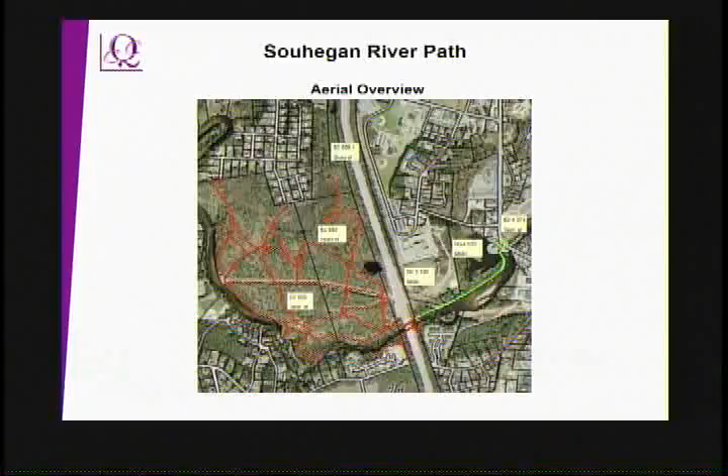Real quick, you've all seen this, I'm sure most of you. This is an aerial view put together by Kyle when he did the request for qualifications. Everything in red is current existing trails to the west of the Everett Turnpike, and the Everett Turnpike is in the middle. The green is the project limits, which goes from the Everett Turnpike down to Watson Park.

As most of you know, adjacent to the Everett Turnpike is a pedestrian bridge that the town acquired some time ago and had installed during the reconstruction of the Everett Turnpike, providing a crossing for the Souhegan from north to south. The existing trail picks up there, runs through the woods, and we're looking to upgrade the whole trail according to the requirements of what we want to do.

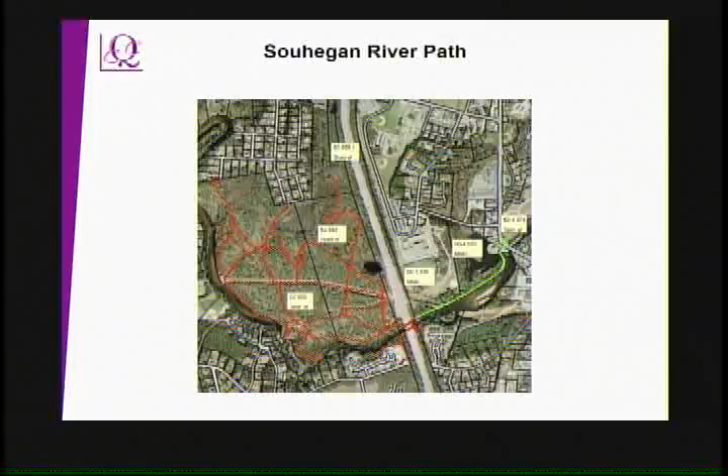Well, that didn't come through very good, did it? Anyway, existing conditions - we already did the existing conditions I talked about. We established a purpose and need that followed out after the local concerns meeting of June 17th, and we have forwarded that.

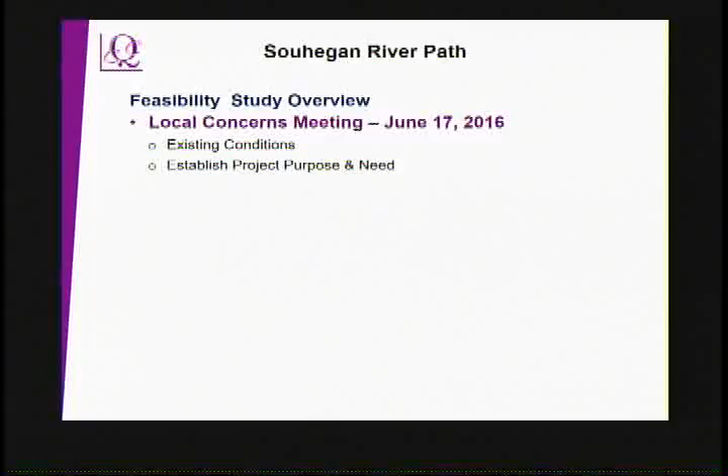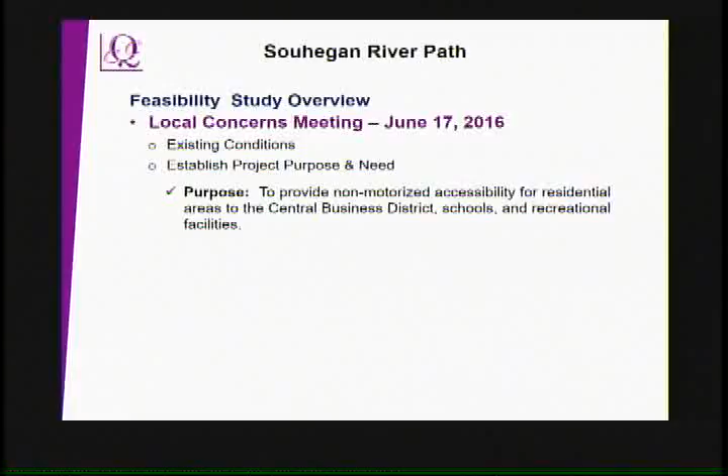Purpose is to provide non-motorized accessibility for residential areas to the central business district, to schools, and to recreational facilities, i.e. Watson Park. The need, as defined here - the need is to provide a connection from the Everett Turnpike pedestrian bridges and residential areas to the Central Business District, Watson Park, along the banks of the Souhegan River, basically the path as it exists today.

This trail surface is about 2,500 feet. It will be hard surfaced according to ADA requirements - hard surface meaning stone dust, things like that, it doesn't have to be paved. So it's easily accessible by people in wheelchairs, utilizing walkers, or any type of handicap, for anyone who wants to use it.

Without this trail, people would have to access through school properties to the east of the Everett Turnpike, go down Baboosic Brook and Baboosic Road, and back down to Watson Park, which is about a mile of detour. But it also means putting people through the schools, and as we all know in today's world, having random people walking through school property is not one of the best things to do while school is in session.

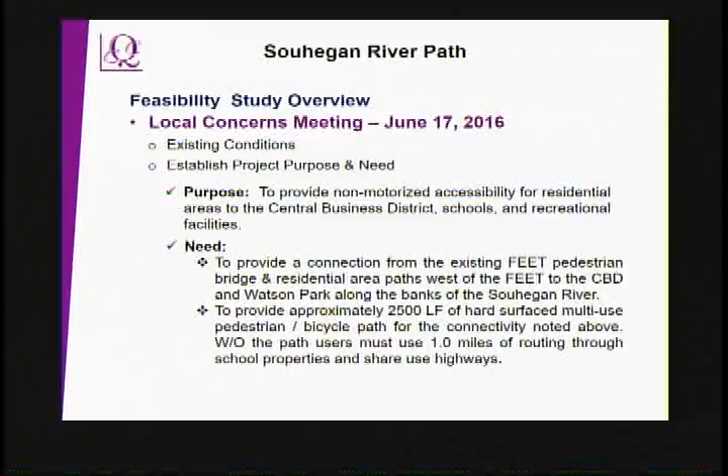So we developed 4 alternatives for the Souhegan River path. One of them, as I was just explaining to Nelson, is basically the Souhegan River path from the FE Everett Turnpike to the fire station. Then once we got to the fire station and crossed the impoundment area, we developed 3 different variations on a theme of getting from there to Watson Park.

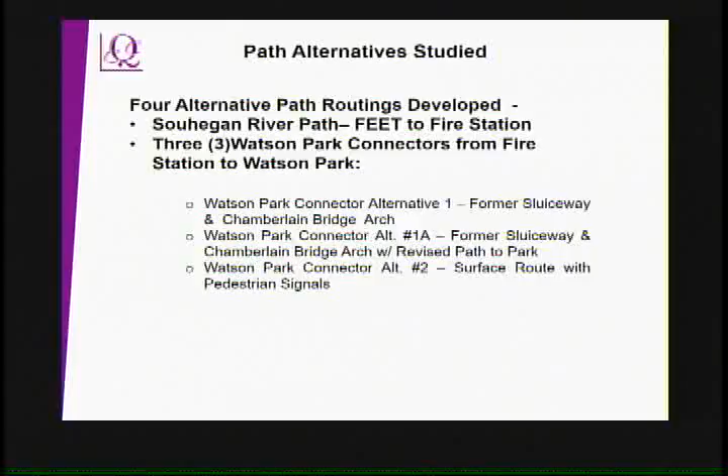Connector Alternative 1 goes down through the former sluiceway of the dam and underneath Chamberlain Bridge, utilizing the existing arch, then connects with Watson Park. It also has some reconstructive work necessary for the existing cantilevered sidewalk that's out there, since we'd be removing pieces of the support systems and constructing retaining walls.

Watson Park Connector Alternative 1A was a concept to look at moving the trail. Once we came through, underneath the Chamberlain Bridge, maybe we move a little further away. We still do the work required for cantilevered sidewalk repairs and reconstruction on US Route 3, but maybe move it out a bit and use more of an embankment fill so we don't need as high retaining walls. You'll see this illustrated later on as we go.

Alternative 2 was a completely new one, a surface route. Once we get across the former impoundment area, there's a drainage swale to get up to the fire station, then go by surface route, utilizing existing and enhanced municipal sidewalks to cross US Route 3 at the existing entrance to Watson Park, which would have to include pedestrian signals, as we all know the traffic volume out there.

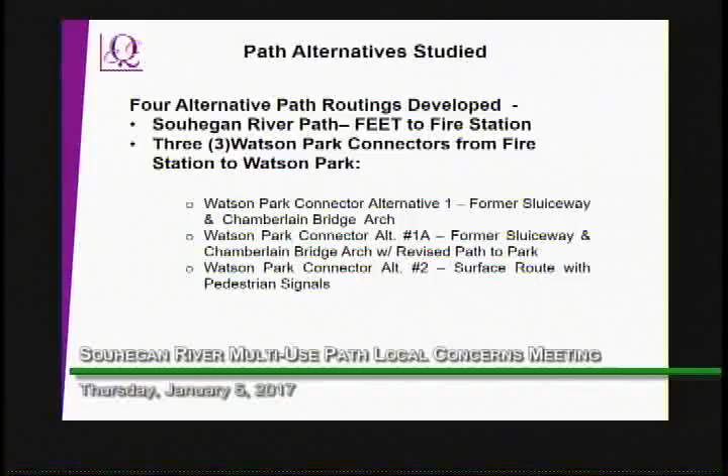So that's a synopsis, real quick, of what we were trying to do. Let me get started on some of this as we go forward.

The section from the Everett Turnpike to the fire station is about 1,965 feet. The existing trail out there is 5 to 6 feet wide. We are looking to widen it to 8 feet because the intent was to be shared use, for pedestrians, bicyclists, and so on.

Under federal highway guidelines for trails, shared use paths should be 8 to 10 feet wide, so you don't have to worry about pedestrians getting overrun by bicyclists. So we were looking at putting it in at 8 feet.

The other thing we're looking to do out there is keep it on the existing alignment as it goes through the trees. It's such a beautiful run. We don't want to start cutting down trees unnecessarily to straighten this out. We want to keep it curvilinear, which enhances the beauty and the desire to use the trail.

There's also, as you go forward, a number of interconnects that come down from the school, paths that come down. We want to maintain those and provide good access, a good interconnect there, so people can use it to get to the schools. That's one of the ideas of the purpose and need, getting access to the schools. So we'll keep those trails.

There's also a side trail that takes off and goes down by the river, and as you'll see going further, we're going to maintain that. It's not on the primary trail, but it comes off of it, and that would maintain that access.

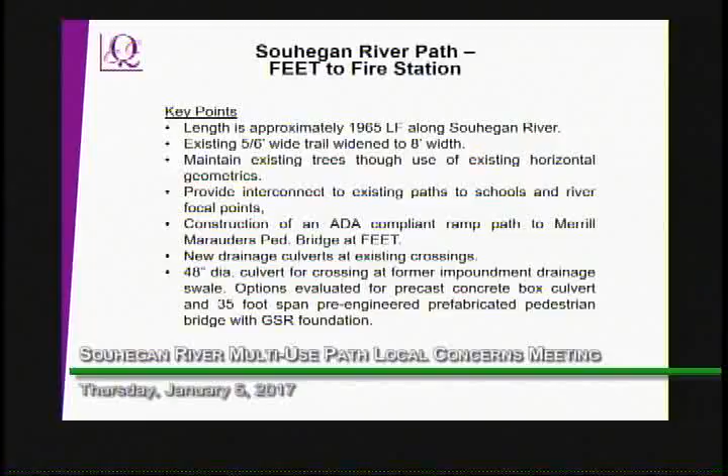So let me get into the first of the slides for the trail. They come down from starting at the Everett Turnpike and moving down towards the town. As you can see on the slide, we have the trail goes outside the existing trail and wraps around, comes back down.

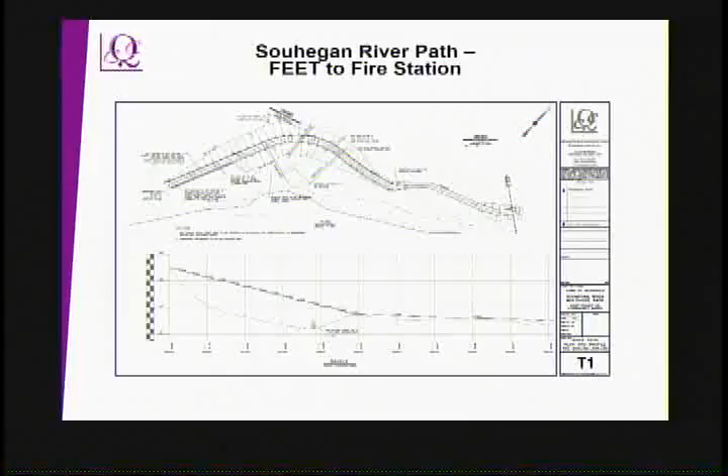The lines you see sloping out are called slope limits. We have to build this trail up quite a bit, 12 to 15 feet, to make the ADA handicap grades, maximum grades. Right now, the trail has a 19% grade as it comes up to the bridge. Not allowed under ADA. We have to adjust it so it is ADA accessible.

So that whole loop that comes out and comes back into the trail is all ADA accessible. As you can see to the left of the screen on the profile, there's a bunch at 12%, 1 in 12, 8%, and we've got resting areas to get this in. We're also replacing a footbridge with a 48-inch culvert, and basically mid-screen we come back onto the existing trail alignment and we continue forward through the project.

In some places it's a little steeper than ADA. We also had some footbridges, so what we're doing is putting in some culverts and kind of smoothing the trail out. The intent for most of the trail as we go through, you'll see, is to try to keep the elevation of the trail slightly above the existing, because as we smooth it out, put new gravels in, grade it off, and have it fairly uniform.

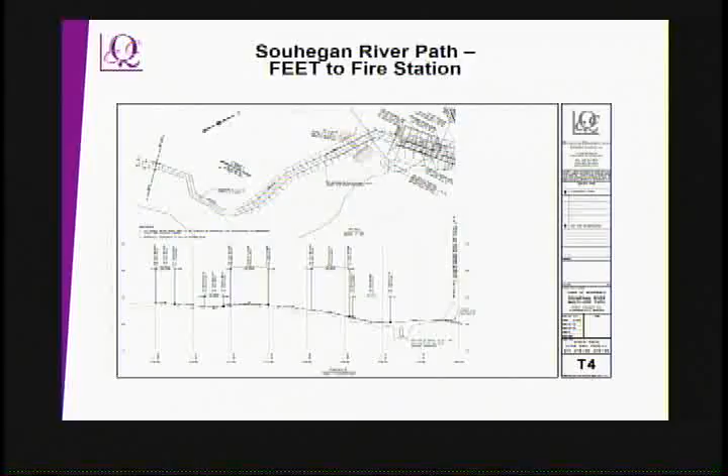How do we get from, once we cross the impoundment, do we either go down into the headgate structures for the old dam and go through the sluiceway, which is alternatives 1 and 1A, or do we at this point build a switchback ramp system to get up to the fire station, which is further detailed a little bit further on. So let me jump ahead.

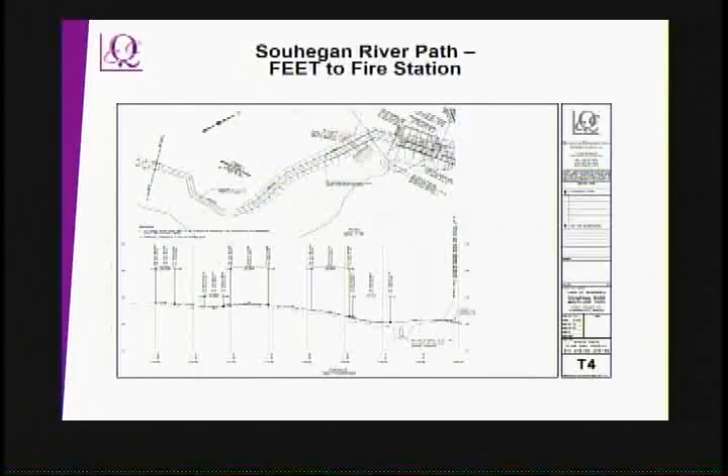We can come back for questions and look at this, but let's try to get through a lot of this. Alternative number one, this is the primary one that the TAP grant was based on, was getting down through the sluiceway, using the sluiceway.

This is about 440 feet of length, with an 8-foot width as we showed. We're using the historic head gates—there's 2 head gates down in there, approximately 6 feet wide, with sufficient head. Right now they're 6'8", but we've dug down and found about 15 inches of gravel. One has a bulkhead, one is concrete. If we take out the head gates themselves and just leave the existing opening, we have sufficient headroom for people.

to get through on a bike, as it appears right now. We continue to use the sluiceway as we get down through, go underneath Chamberlain Bridge, and get into that whole labyrinth of beams and retaining walls that were originally built by the DOT in support of International Shoe. When that was there, International Shoe left, and Harcross Chemicals came around. But all that was originally built by the DOT for loading docks and to support the roadway. So we're looking at taking that out.

I'll have some details in a minute on what that's going to look like. But we take the retaining walls out, put in a new retaining wall, slope it off, rebuild the cantilever sidewalk, and we have some MSE—mechanically stabilized earth walls. These are the retaining walls we're talking about. They use grids to hold the face panels up. They basically reinforce the earth, and the front panel just provides a nice closure to the system, because the earth is reinforced by the geogrids. It doesn't want to go anywhere.

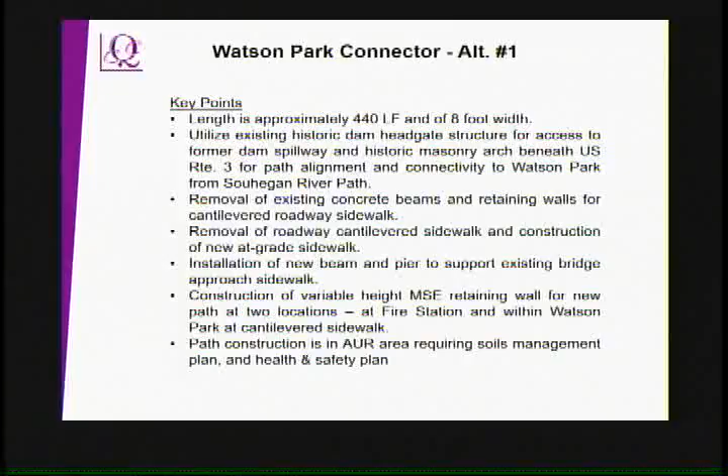What we did as alternate 1A basically follows the same thing—it's going to go back under, but as I said, we moved it a little further away. It's a little longer path. We tried to decrease the amount of MSE walls, the heights of MSE walls that had to be built in the vicinity of US Route 3. It pushed the path further into the AUR site, so there's more work with the contaminated soils.

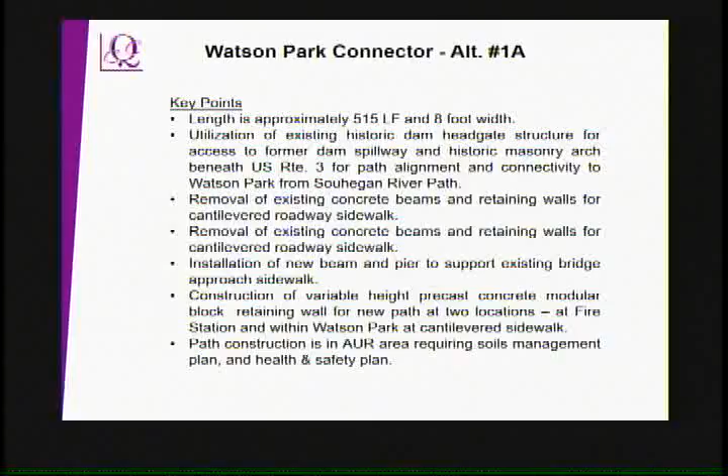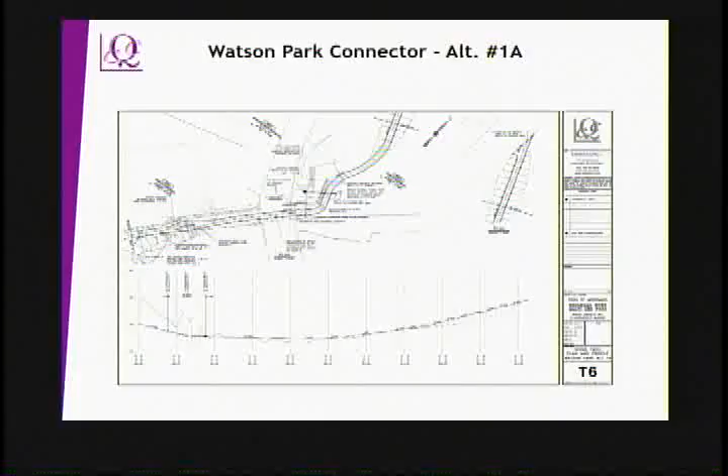The work for reconstructing the sidewalk, because we're taking this stuff out and building it on grade on the sidewalk along Route 3, that's still part of the process. Now let me give you a slide and update you on the differences between alternative 1 and 1A in that vicinity.

Okay, no. And that's what that would outlet into, is that channel, to take the water that collects in behind any rainwater coming off on the embankment, soaking down through, so we don't have hydrostatic pressure. It goes down in through there.

All of Route 3 work is still identically the same. You've got to take the cantilevered sidewalk off, you've got to infill with soil embankments, then you've got to rebuild the sidewalk. And then the trail is approximately the same elevation as we go through the project in this area, just a little longer run out through the AUR site.

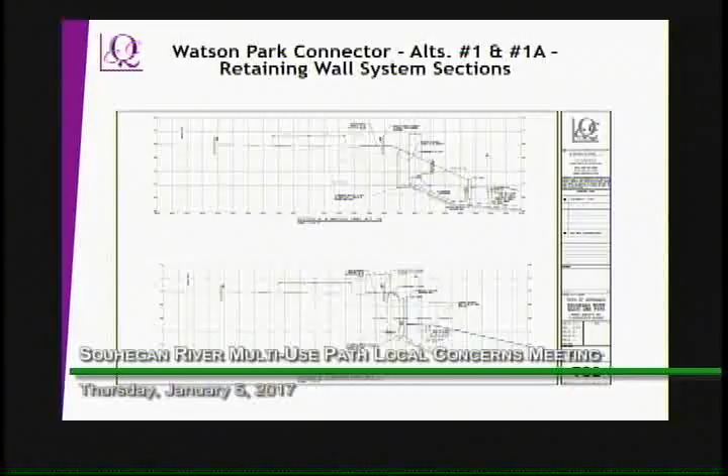I know I'm speeding through this, but I'm trying to get us all up to date. Now, alternative 2 -- this is the surface route that we looked at. It's approximately 750 feet long. It utilizes existing sidewalks on Route 3, the west side of Route 3.

There are areas where there is no sidewalk, down towards Buckley's Cafe, if you're familiar with that, the fire station. There's also, as you get closer towards Baboosic Lake Road, towards the entrance to Watson Park, a wide driveway that doesn't have a sidewalk. We'll have to put a sidewalk in there.

Municipal sidewalks are 5 feet, so what we construct would still be 5 feet. What's included in this, as I mentioned earlier, is we've got to come from a trail elevation down by the impoundment area of about 120 to something that's approximately at the fire station about 132, and it's a very steep slope right now. To make that accessible, we have to build this handicap switchback ramp system built at maximum gradient.

There's not a lot of land area there. Real estate's at a premium right there -- it was all taken up by the river and the dam. So that level area is very tight, and if we're going to put an 8-foot sidewalk in there, it's very close to the building.

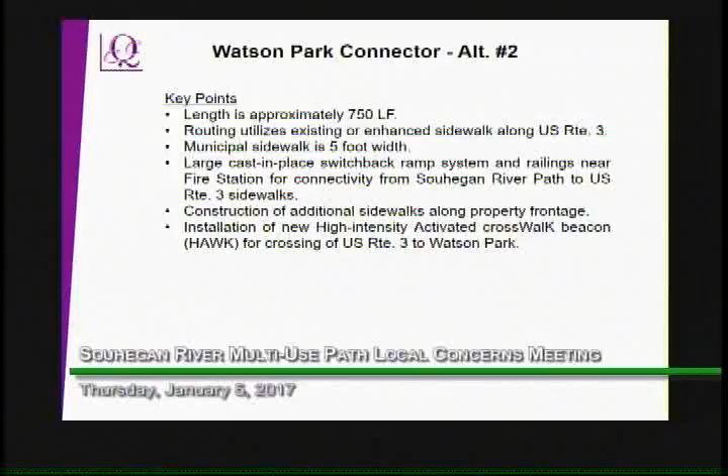But anyway, as I mentioned, it goes to get across. We have to continue along the front of the fire station where the parking spots are. They get vacated, and then we cross Route 3 across the fire station entrance.

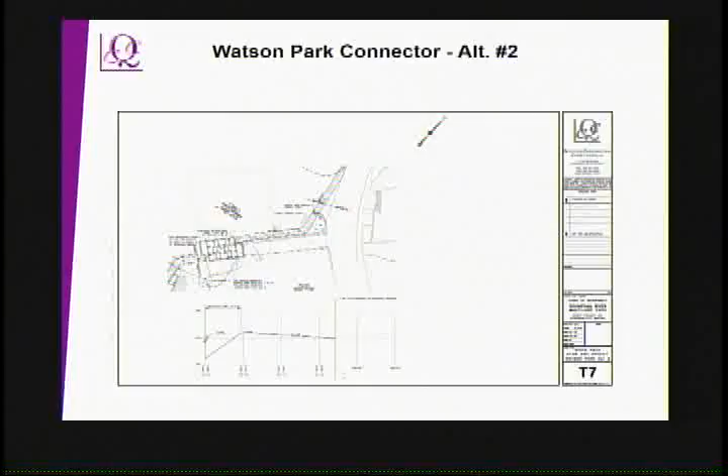This next plan picks up from just between Buckley's and the fire station. As you can see at Buckley's, right now what was all open, we're looking to put in some sort of pedestrian safety. We'd put in a new island, new sidewalk, and narrow up the entrance to Buckley's Cafe, which also means some reconfiguration of parking in front of Buckley's Cafe now. It basically serves to have defined movements for Buckley's Cafe and the fire station. They're kind of blended right now when you get towards the two of them, but that would be required for us.

As I mentioned, a lot of the sidewalk that exists now was recently rebuilt, and we continue to utilize it with no changes. But there are areas, as I mentioned, at Buckley's Cafe, between Buckley's Cafe and Buckley's Steakhouse, where there's also a need for an island between those two driveways, and for a pedestrian sidewalk. Then further up to the north, between that Y driveway, we'd have to build a new sidewalk between both legs of the Y.

And then at Watson Park, here's where you see the painted crosswalk coming down and the signals. That's how you would get into or out of Watson Park and onto the trail system. The problem with that is, again, this is supposed to be shared use, and these are some of the evaluations. We do a whole alternative analysis: what are the pros, what are the cons. This one has a lot of cons with it, more than pros.

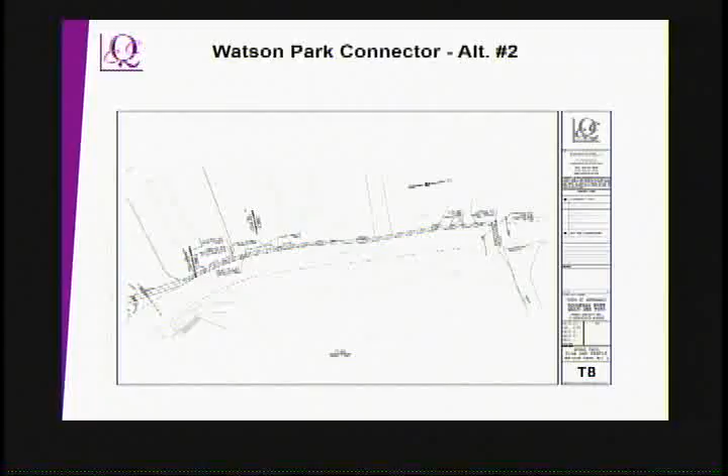In our feasibility report that will get generated when all this is done, with all these diagrams and everything in there, that will be cited as an alternative that doesn't meet the purpose and need. Therefore, it is not a preferred alternative. And the idea of all this is we're working, as Don mentioned, to get to the preferred alternative as quickly as we can.

We have to look at natural resources and cultural resource impacts, which is starting with the DOT process now. I'm just going to give you a quick synopsis of what the feasibility study includes.

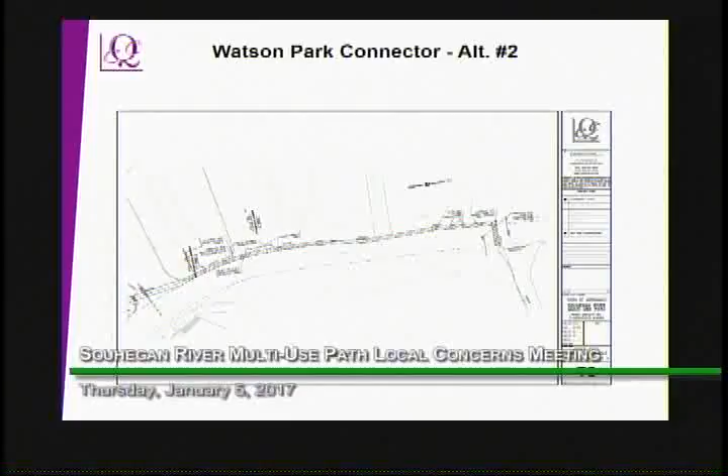A lot of people think you just come up with a trail and you can do all this. Well, we did the local concerns meeting. We identified the design criteria. Federal Highway has a nice 270, 340 page book of trails criteria - again, 8 feet wide, cross slopes, maximum running slopes.

Existing conditions - what we did is we pulled together available resources, there's been a lot of stuff available through the town that we were able to pull together in DOT, including a lot of the retaining walls and cross beams that we identified earlier. The town had developed a plan.

We also went back to the 1934 DOT plans. We took the dam plans. We put all this together to make what you saw as existing conditions as we ran through all these sheets.

That's been done. We had to do the hydraulic analysis for the impoundment area, and we came up with the sizing of the 48-inch culvert. We're in the process of doing the alternative study and preparing the cost estimates.

Cost estimate is the last thing, to verify the budget. We've gotten the preferred alternative, this is scoped out, now we verify a budget. Then we come back and do the public information meeting on the preferred alternative with numbers and everything, and get your input. Basically we say this is what we're doing, and then we submit the feasibility study report.

Schedule-wise, as I was talking with Nelson, we are running behind. That was based on a decision by myself and Quantum. There was an outside entity that had interest in doing some work within the U.S. Route 3 area that would have had a significant impact to our existing conditions. So we took a step back to see what was going to happen, and that didn't happen. Their work's been postponed.

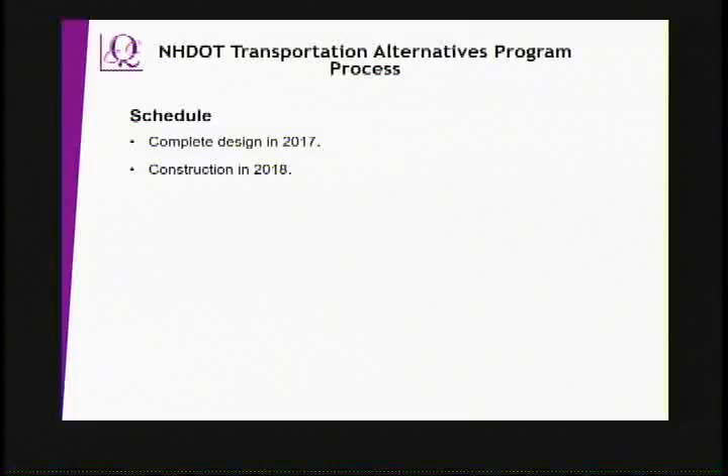We've redone the schedule such that the design will be completed this year, and construction will be done in 2018. That is the schedule currently listed on the DOT's advertising schedule. That's what's out there, so that's the schedule we're working toward now that we've picked back up and are trying to move as fast as we can.

So that leads me to this nice little one where it's much louder than I am.

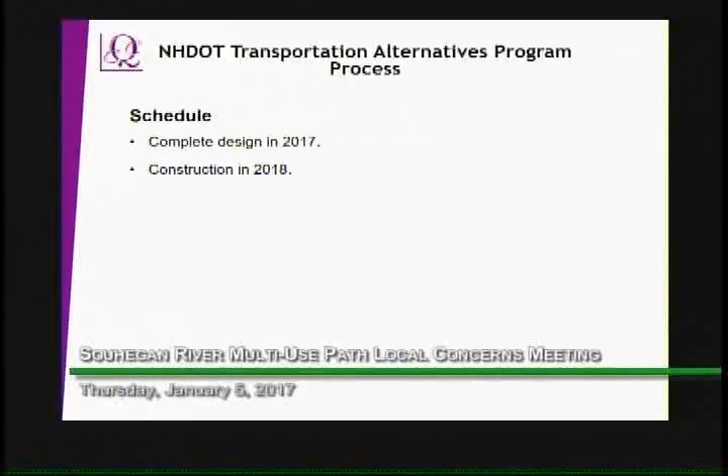Questions? I've tried to give you a brief summary in 35 minutes. Any questions, comments you want to throw out? That's just trying to bring everybody up to date on where we are.

Yes, ma'am, yes I do have a comment. Can we pass you a microphone? Because we are being recorded for posterity. I have a comment about the, what do you call that blinking light, the hawk signals. Oh, it's not on. Hey, on now. Sounds right.

I have a question about the walk light and so forth. Sure. I have a whole room full of advisors here. Feel like you're working in an office, right? Yeah, an honest job.

That is like the most dangerous spot in town, it seems to me. The fire chief would know better than I, but there's intersections coming in, the park exit, the lobster boat, Loop Road going off, the CVS light, and Woodbury coming down. Additionally there's some kind of a walk light. I almost got hit once just walking along the side of DW Highway there because people go too fast for the road. I think just that alone would make me think it was inappropriate.